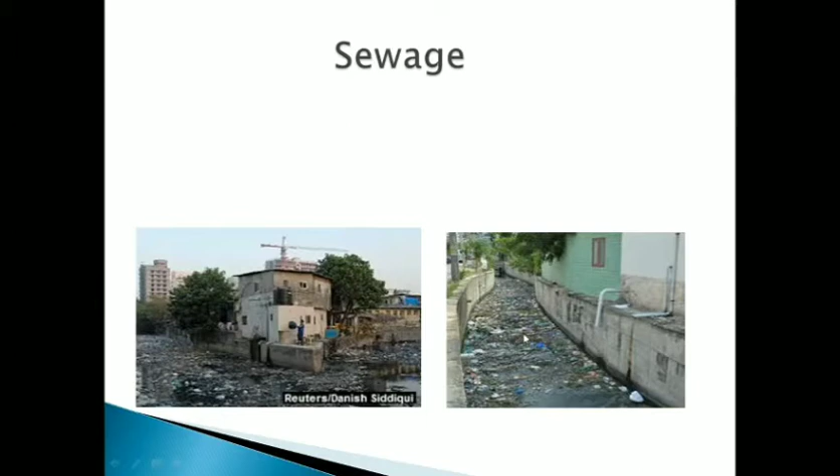Right. What all can you see inside this? You can see large amounts of floating debris. Some things are floating. Right? There is black colored water. This is what is called sewage. So let's see, how can we define sewage?

Sewage can be defined as the municipal wastewater. Right? It is the municipal wastewater containing large amounts of organic matter, human excreta, and disease-causing microbes. So what all are found in the municipal wastewater? There will be large amounts of organic matter, large amounts of human excreta and disease-causing microbes. These disease-causing microbes are called pathogens. We have studied about it.

Okay, now what do you mean by organic matter? Organic matter refers to a large source of carbon-based compounds found within natural, terrestrial and aquatic environments. So organic matter is nothing but carbon-based compounds found in nature, and it is usually formed from the remains of plants and animals and their waste products.

So now, in the sewage, when we talk about organic matter, what does it mean? It means the waste which is present in this sewage. That is the food waste. It can be food waste, it can be plant waste, it can be remains of plants, it can be remains of animals, and so on. And it also contains human excreta and disease-causing microbes.

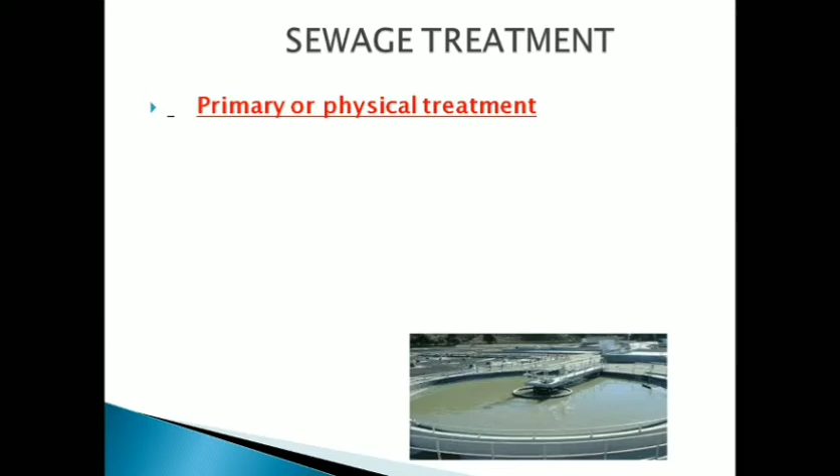Primary treatment or physical treatment does not involve any microorganism. It involves two major processes. One is filtration and the other one is sedimentation. Now you all know what filtration is. The floating debris or the lighter particles, as you have seen in the previous picture, when sewage is flowing through the canals, we can see floating debris like plastic waste, plastic covers, paper and all those. So those are the floating debris.

So floating debris has to be removed by the process of filtration. You know what filtration is? Filtration is nothing but removing the floating debris with the help of certain wire meshes. Just like your mother strains the tea powder. After making tea, she sieves it using a sieve, right? The tea powder will be sieved, and the same way the floating debris, that is lighter particles, can be removed by the process of filtration.

And the second one is sedimentation. The heavier particles will be allowed to settle down. Okay, so these are the two steps involved in primary treatment: filtration and sedimentation. So here you can see floating debris is removed by filtration, and the grit, meaning heavier particles consisting of small pebbles and soil, will be removed by sedimentation. So these are the two major steps involved in primary or physical treatment.

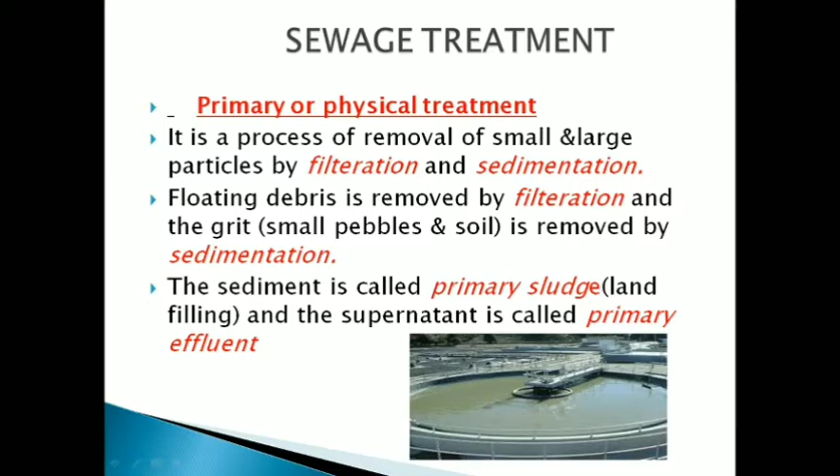Now let's see about the secondary treatment. Secondary treatment, as I've told you, is also called biological treatment. Why? Because microorganisms are involved in this step. Both aerobic microorganisms as well as anaerobic microorganisms are involved in the secondary treatment process. That is why this treatment is also called biological treatment. Okay, now let's see what happens here.

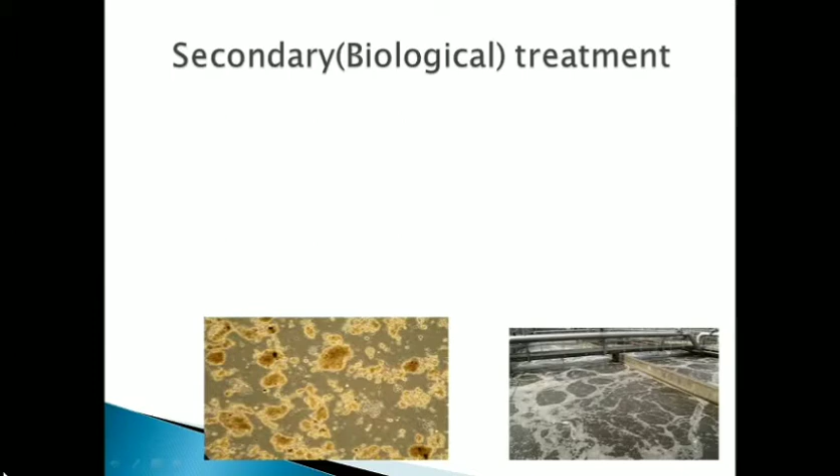So the primary effluent which is formed after primary treatment is then passed into large tanks. Here you can see this is a large tank where the primary effluent is passed, a large aeration tank. Aeration means air is pumped into it, meaning oxygen is supplied, and then it is agitated mechanically. Agitated means it is stirred mechanically. So using certain devices, the primary effluent which is now in the aeration tank will be agitated and air will be pumped into it.

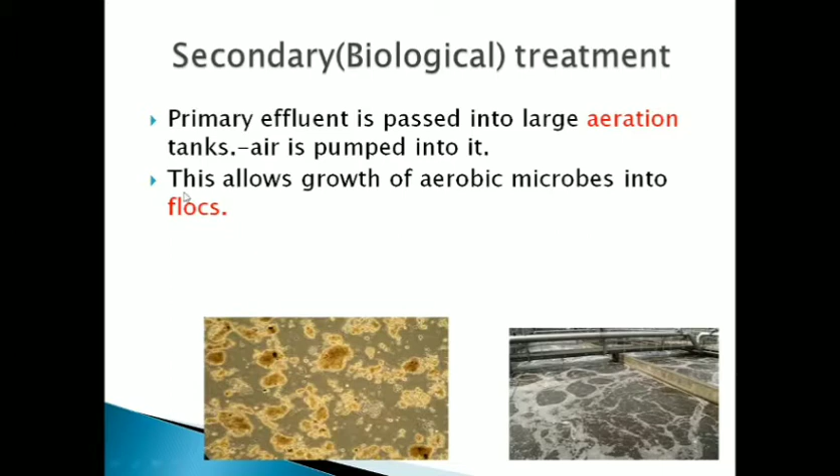When air is pumped into this, the microorganisms, which we have seen are present in large numbers in the sewage, especially the aerobic microorganisms, start consuming the organic matter present in the sewage. Since air is pumped into it, there will be vigorous growth of microorganisms. The air allows the growth of aerobic microbes into flocs. Flocs means the masses of bacteria associated with fungal filaments, that is, aerobic bacteria along with fungal filaments. This is a floc. Here you can see.

So these are the flocs which are formed as a result of aeration, or pumping of air into this large aeration tank. So there will be vigorous growth of aerobic microorganisms, and these microorganisms along with the fungal filaments are called floc. Okay, hope you got it. Now, the sewage will be allowed to be in the aeration tank, and it will be agitated constantly. Air will be pumped into it till the BOD is reduced.

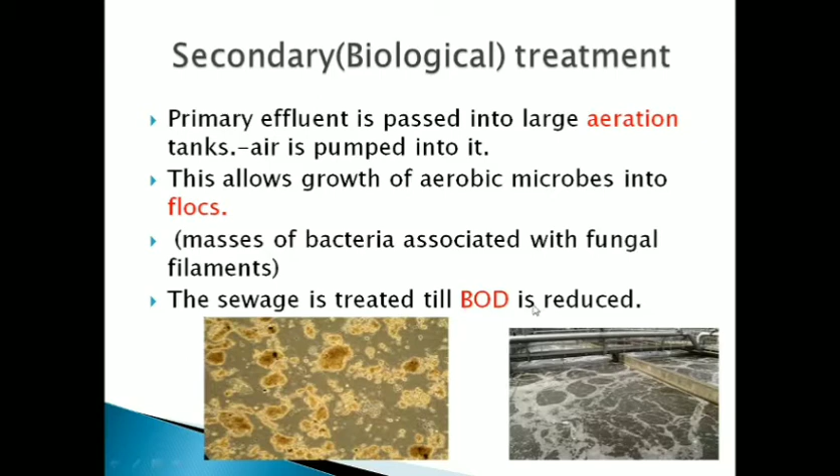Now let's see what is BOD. The expanded form of BOD is biochemical oxygen demand. Once again, biochemical oxygen demand. Very important. Now let's see what is biochemical oxygen demand. It refers to the amount of oxygen that would be consumed if all the organic matter present in 1 liter of water were oxidized by bacteria.

Once again, BOD is very important from the examination point of view. You may get this question: define BOD and what is its significance. So you have to study this definition by heart. It refers to the amount of oxygen that would be consumed if all the organic matter present in 1 liter of water were oxidized by bacteria. Now let me explain what's the meaning of this.

It means, in a very simple term, we can say the amount of oxygen required by the microorganism, that is aerobic bacteria, to break down the organic matter present in 1 liter of water or present in the given sample of water. Just imagine you have with you 1 liter of polluted water. Now what will be present in that polluted water? Organic matter will be present and aerobic microbes will be present.

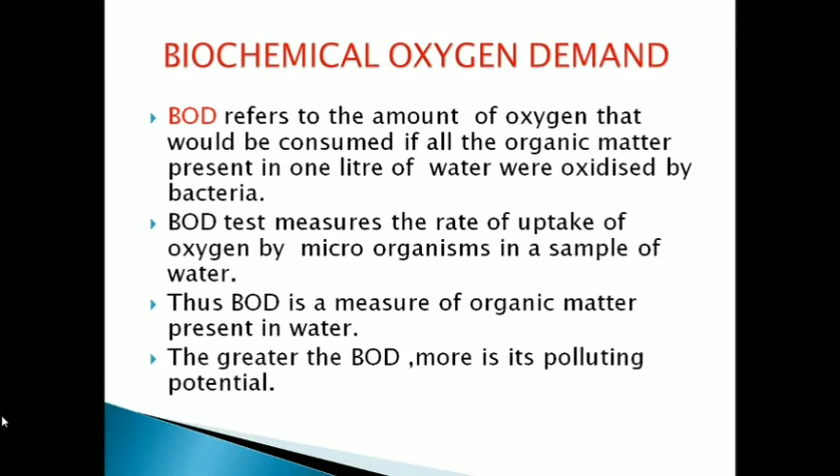Now once the BOD is reduced, what is the next step? The effluent which is now there in the aeration tank is passed into another tank called as settling tank. So first one was aeration tank. Now it is passed into the next tank, which is called as settling tank. From the word itself, it's very clear. So in the aeration tank, flocs were formed. What are flocs? Masses of bacteria associated with fungal filaments. Now these flocs will be allowed to settle. Now this sediment is called activated sludge.

So in primary treatment we have seen which sludge? Primary sludge. What is primary sludge? The sediment which is formed after removing the floating debris, after filtration, what gets settled down, that is called as primary sludge. Now this is activated sludge. Activated sludge is nothing but the flocs which are formed, which get settled in the settling tank, passed from the aeration tank.

So in aeration tank, what has happened? The aerobic microorganisms have consumed or broken down the organic matter, and there will be vigorous growth of microorganisms resulting in the formation of flocs. And now when this effluent is passed into the settling tank, the flocs get settled down. And this settled floc is called as the activated sludge.

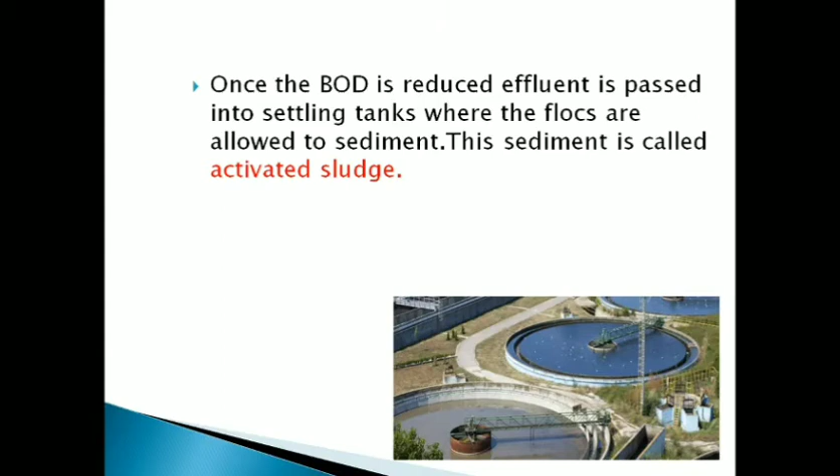Now a small part of the activated sludge is pumped back into the aeration tank as inoculum. We have seen the word inoculum earlier also. In which context have we seen the word inoculum? Do you remember? Yes. Curd is used. A little bit of curd is used as an inoculum when we convert milk into curd. Right. So inoculum is nothing but a starter.

Now why is this small part of the sludge added into the aeration tank? Because in the aeration tank, the aerobic microbes in the beginning may be less in number. So we add a little bit of this activated sludge, which contains aerobic microbes along with fungal filaments. It will allow vigorous growth of microorganisms and the breakdown of organic matter. So a small part of activated sludge is pumped back into the aeration tank as inoculum.

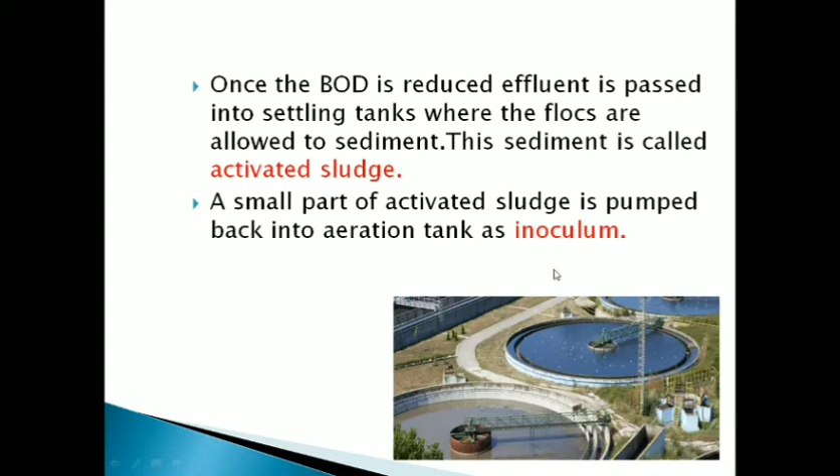What happens next? Activated sludge is then passed into large tanks called anaerobic sludge digesters. After this, from the settling tank, a little part of this activated sludge is pumped back into the aeration tank, and the remaining major part will be pumped into large tanks called anaerobic sludge digesters.

Very clear, anaerobic. Here there will be the growth of anaerobic microorganisms. So there will be no air. Oxygen will not be present in this kind of digester. That is why in this tank there will be no oxygen, and there will be growth of anaerobic microorganisms. So aerobic microorganisms cannot grow in this tank, that is the anaerobic sludge digester.

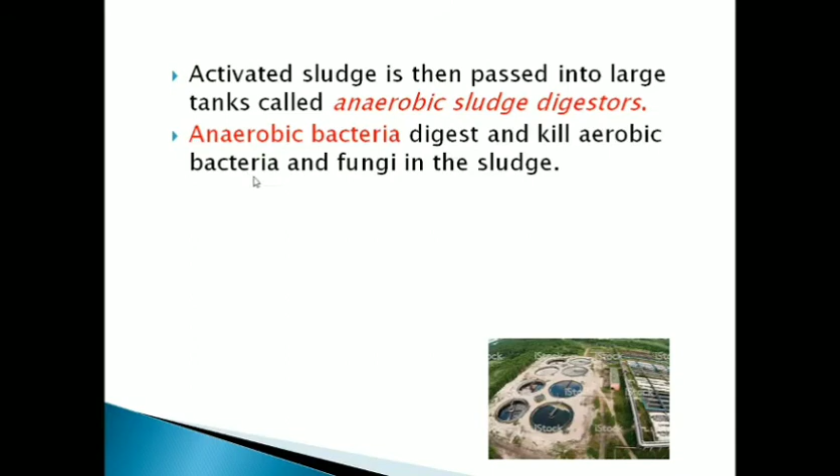So in the anaerobic sludge digester, anaerobic bacteria digest and kill the aerobic bacteria and fungi in the sludge. During this process of anaerobic digestion, a mixture of gases will be produced. Which are the gases? Methane, hydrogen sulfide and carbon dioxide. These are the three main gases produced by the action of anaerobic bacteria, which is called biogas.

You must have heard about biogas, and we'll be studying biogas in detail in the next class. For the time being, you should know that when the activated sludge is passed into anaerobic sludge digesters, the anaerobic bacteria act on the aerobic bacteria and fungi and kill them. During this digestion, a mixture of gases like methane, carbon dioxide and hydrogen sulfide is produced, which is called biogas. This biogas can be used as a fuel, as a source of energy.

Now what remains after this anaerobic digestion, that is the effluent from the secondary treatment plant, is ready to be released into water bodies, because the BOD of the effluent will be very low now. The secondary treatment is completed, so organic matter is completely broken down. The BOD is reduced and it is safe for this water to be released into water bodies. Hope it's clear. So that is all about sewage treatment.

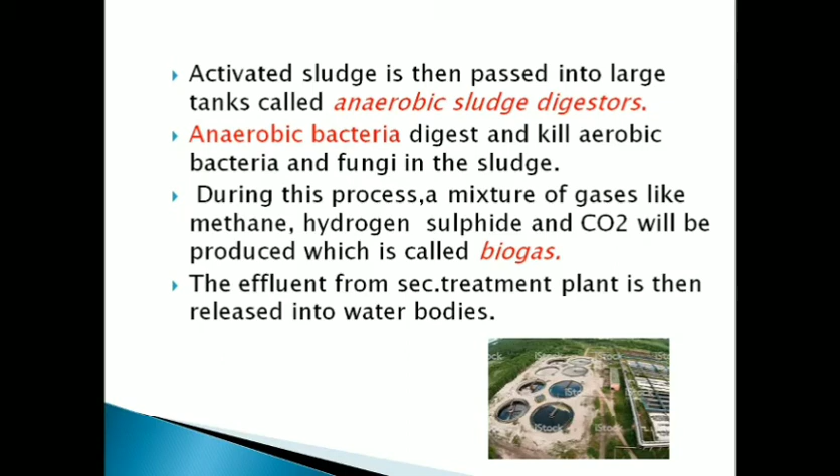Now let's once again summarize the whole process of sewage treatment, very important from the examination point of view. When it is asked as a 5-mark question, you need not write the definition or significance of BOD. You only have to write the main steps. First you have to write what sewage is. Sewage is municipal wastewater containing large amounts of organic matter, human excreta, and disease-causing microorganisms. Sewage treatment involves two major steps.

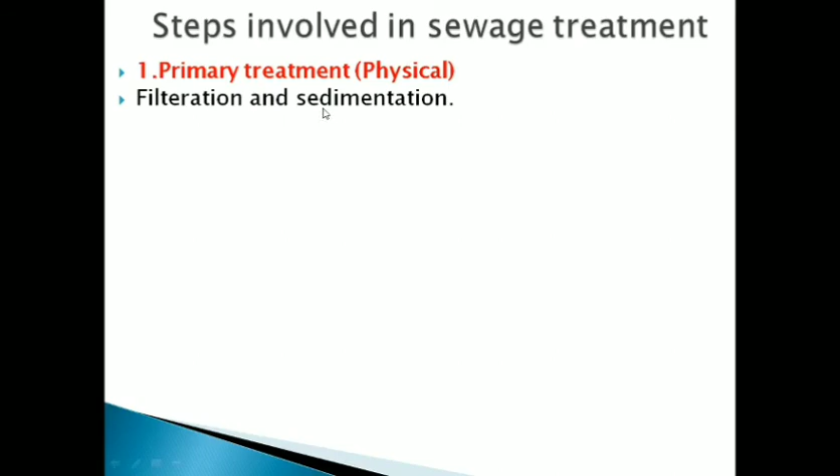The primary treatment and the secondary treatment. Primary treatment is also called physical treatment. Secondary treatment is also called biological treatment. Primary treatment involves two major steps, filtration and sedimentation. Primary sludge is formed as a result of sedimentation, and the supernatant collected after filtration and sedimentation is called the primary effluent. Secondary treatment is also called biological treatment. Hope you are able to understand.

So for primary treatment, two steps you have to remember: filtration and sedimentation. What is filtration? The floating debris, the lighter particles, will be removed by filtration, and the heavier particles get settled down by sedimentation.

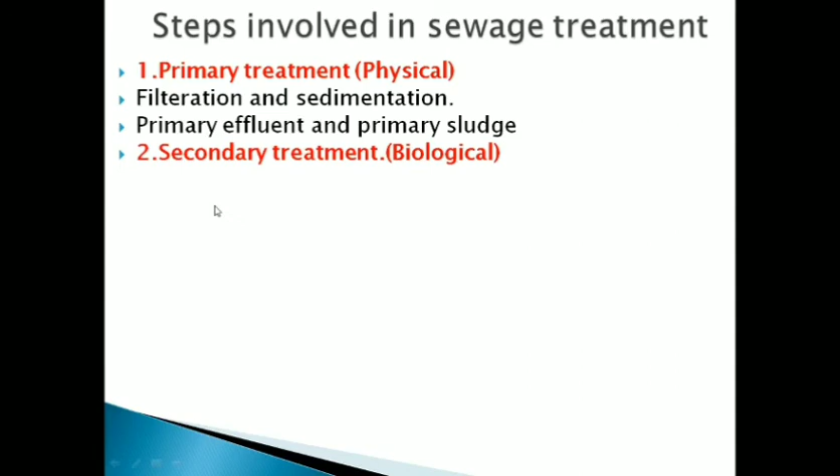The particles which get settled down are called the primary sludge, and the supernatant is called primary effluent. Now the primary effluent is then passed into large tanks called aeration tanks. So when you see the word aeration, you should remember oxygen or air is pumped into it, and it is agitated mechanically. This allows what? Growth of aerobic microbes.

Growth of aerobic microbes along with fungal filaments is called flocs. So the second step in secondary treatment is formation of flocs. Where does this happen? In the aeration tank. Now as a result of this, what happens? The aerobic bacteria digest or break down the organic matter present in the sewage. As a result of that, the BOD reduces. What is BOD? Biochemical oxygen demand.

Once the BOD is reduced, the effluent is then passed into a settling tank. Very clear? Settling tank means settles down. What settles down? The microbial flocs get settled down, and this is called the activated sludge. Then a part of activated sludge is pumped back into the aeration tank as inoculum, and the remaining activated sludge is passed into anaerobic sludge digesters.

For what? These anaerobic sludge digesters contain anaerobic microorganisms which digest and kill the aerobic bacteria and fungi, so that the BOD will be still reduced. So now the water present in these anaerobic sludge digesters can no more be called sewage, because the BOD is completely reduced. The anaerobic microbes digest the aerobic microbes and fungi, and during this anaerobic digestion there will be the formation of biogas. What is biogas? It is a mixture of gases containing methane, hydrogen sulfide and carbon dioxide.

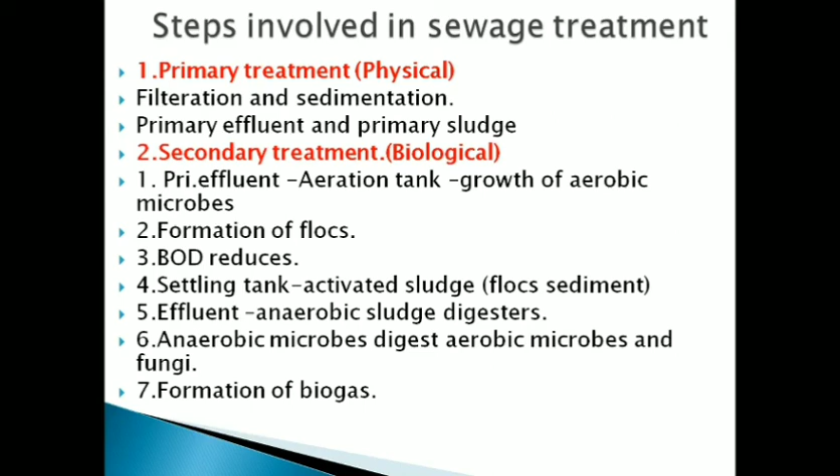Then the effluent is ready to be released into water bodies. Why? Because the BOD will be very, very less. So these are the major steps involved in sewage treatment. You can expect this as a 5-mark question: explain the steps involved in sewage treatment. Sometimes they will ask only to explain the biological treatment involved in sewage treatment. Biological treatment means you have to write only about the secondary treatment. If they ask to explain the steps involved in sewage treatment, you have to write both primary treatment and secondary treatment.

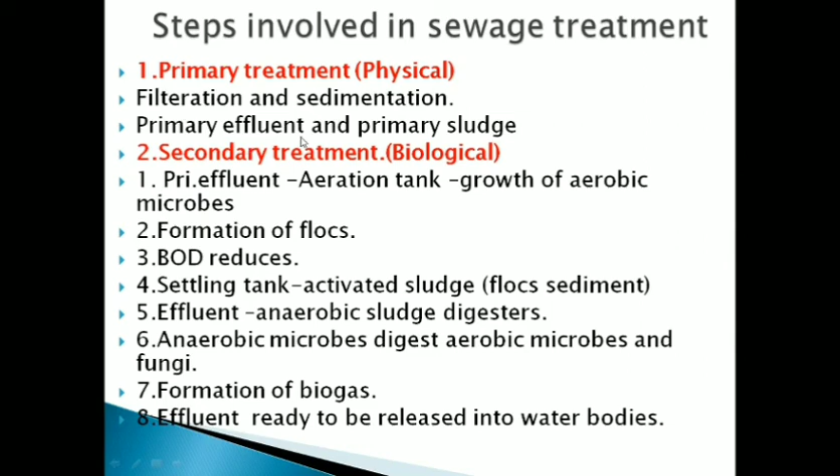If you write only these points, you may not get full marks. These are only the major steps involved; you have to explain each and every step. These steps help you to remember all these stages easily. So when you write about primary treatment, filtration and sedimentation, remember filtration means the floating debris or lighter particles are removed. Sedimentation means heavier particles are settled down. Then what is primary effluent? What is primary sludge? All these things you have to explain. Hope it's clear. So that is about the sewage treatment plant.

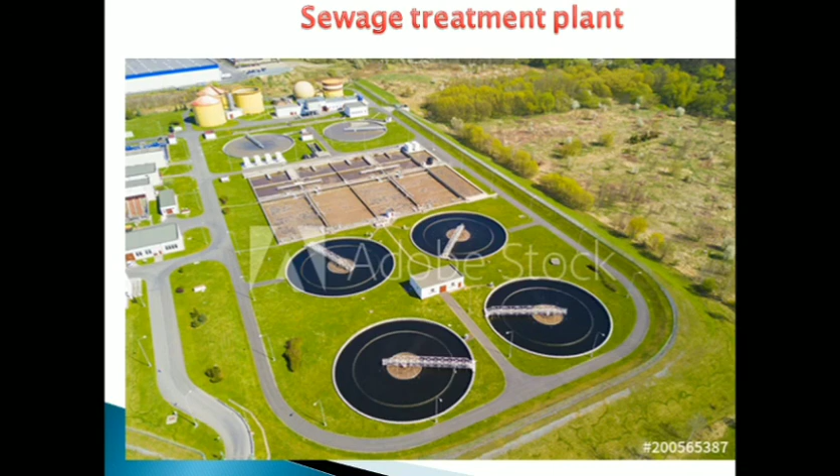So hope you all understood the sewage treatment plant, and this is the picture of a sewage treatment plant. Here you can see the different tanks. Here you can see the biogas plant. The biogas produced as a result of sewage treatment is used as a source of energy, as a fuel. So hope you all understood what is sewage treatment and the role of microorganisms in sewage treatment.